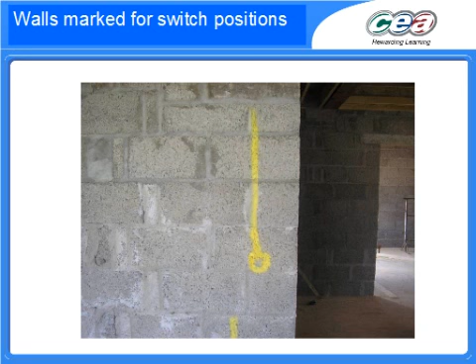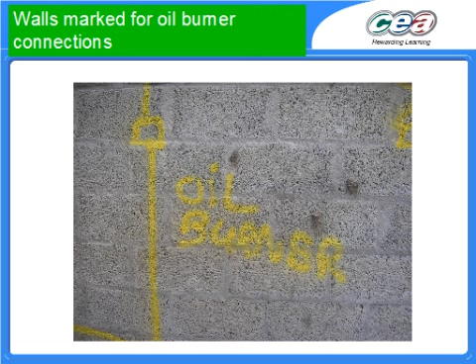First job here is for someone to actually mark out the positions where everything is going to go on the wall. So here are the switches go, here are where plugs and phone sockets go, and of course oil burner connections if that's necessary, or any other electrical equipment needs to be marked in at this point.

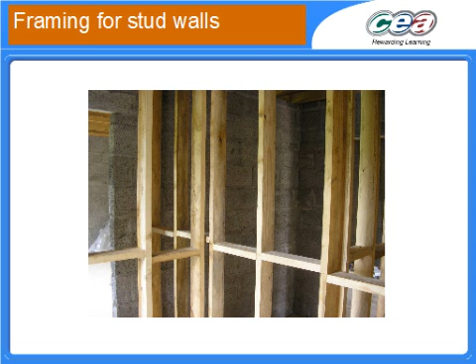Stud walls can be framed up, but they won't be skinned yet because of course there's a good chance that we'll need to run wiring or plumbing inside of those walls. Here are the floors being drilled to receive, in this case I think, soil pipes, or any other pipe work will go through the floors as well. Here's a sink waste by the look of it, 45mm sink waste.

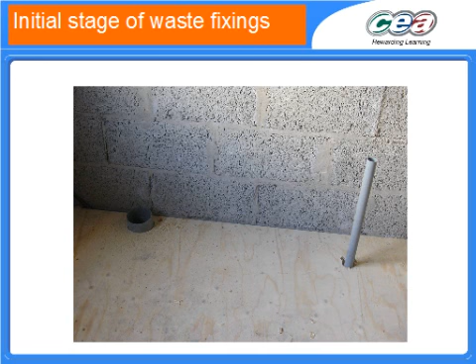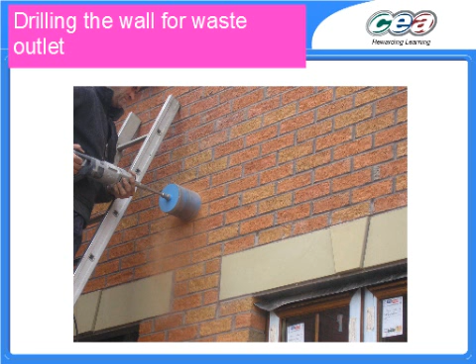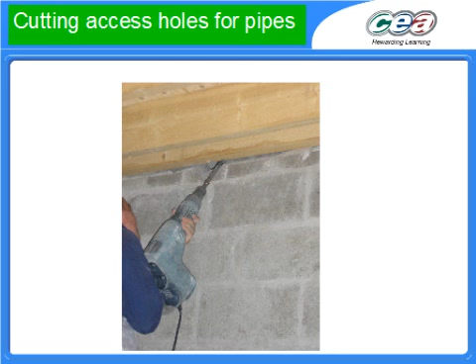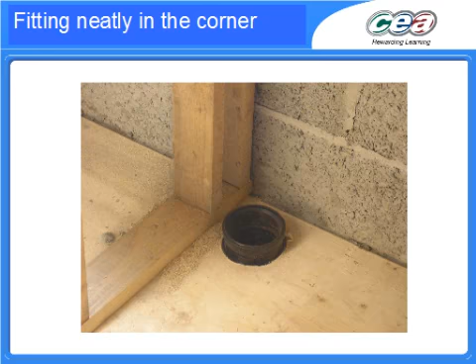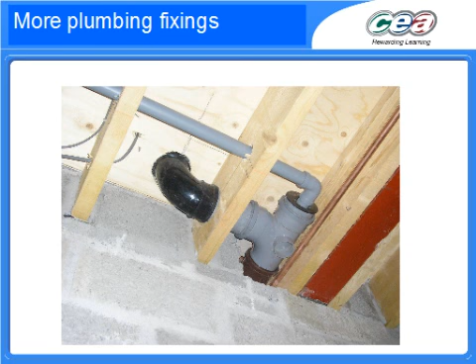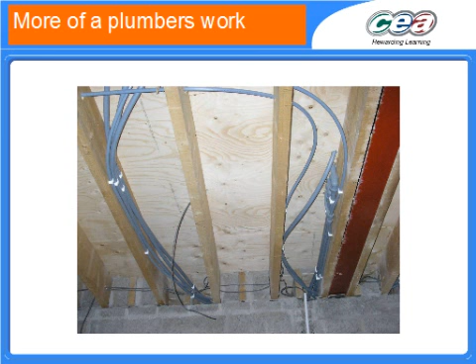Some more plumbing going in. Notice that plastic tends to be used these days, push fit plastic rather than soldered copper. It's quicker and more cost effective. Some more chasing out of walls, tracked, ready for the electrical conduit to be put into place and the wiring inside of that.

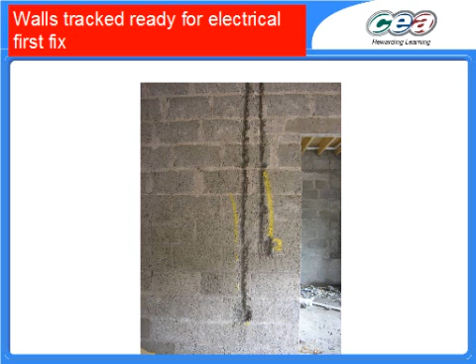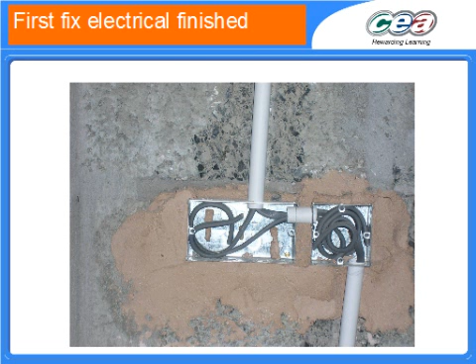Here's a socket plastered into place. That's what you tend to do. Put the white trunking down, or conduit it's sometimes called, with electrical wiring inside of it. Leave plenty of wire over so that it can be trimmed off to size later, and then plaster the socket boxes into the wall. Of course not all wiring can be completed, so sometimes it's just left tied off like this, ready to be completed at a future date.